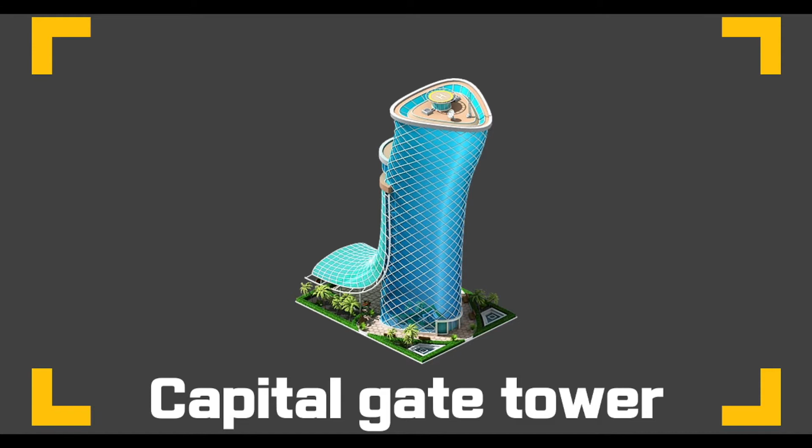It is the Capital Gate Tower. It has its name listed in the Guinness World Records for being the farthest leaning man-made building on this planet, having a leaning angle of 18 degrees. As you can see, this Capital Gate Tower, which is inclined to one side and twists as it goes up, has an appearance slightly off the original skyscraper.

Then how and why did this uniquely shaped tower get constructed? And why was it specifically built in Abu Dhabi? To understand the reason, we need to first know about the historical background of Abu Dhabi and its culture of the Sultan. UAE, which has the 6th largest oil reserves in the world, consists of 7 independent city-states. In these 7 states, the larger the area, the more oil was reserved, which meant strong economic power. Among these, Abu Dhabi was the largest of the states, so also the richest.

However, Dubai, which was 1/15 of the area of Abu Dhabi, was known to be more technologically advanced than Abu Dhabi, which made Abu Dhabi feel a strong sense of rivalry, and there was natural tension between the two. Starting from the early 2000s, Dubai began to construct high and massive architectures like Burj Khalifa and Burj Al Arab. Sheikh Sultan from Abu Dhabi, who was very rich, had studied architecture in his old days and naturally had interest in the architecture industry.

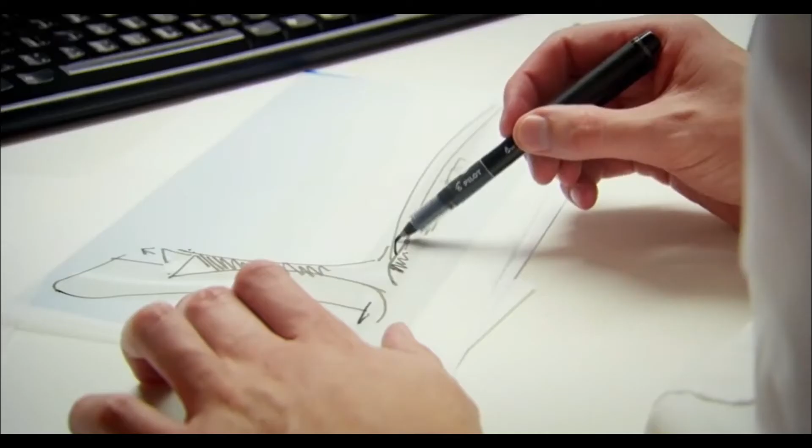Watching the high landmarks of Dubai getting constructed, he had a desire to construct such a landmark in Abu Dhabi too. Having a strong sense of rivalry, he wanted more than just a high and massive building. He wanted something that could be called architecturally impossible. Receiving this request, it was now the designer's job to come up with an extraordinary design that would satisfy the Sultan. The surrounding scenery helped them with their job.

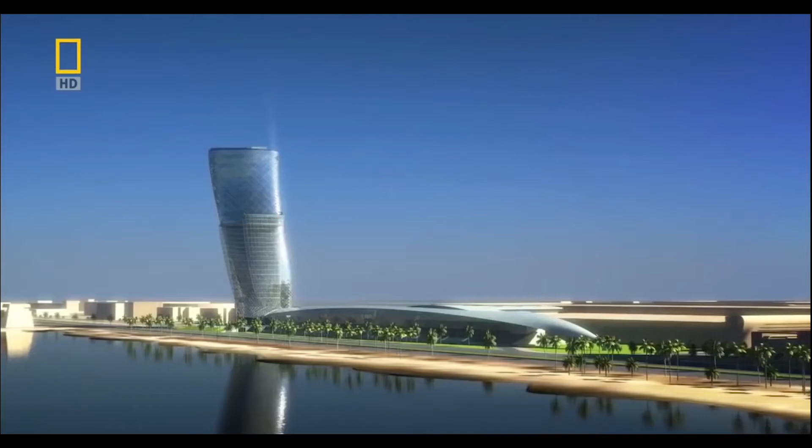The designers got inspired by the beautiful seaside and dunes of Abu Dhabi. Getting ideas from the two elements, the rolling waves and the sand's spiraled shape, they wanted to design a building with a tilted and twisted shape that would go well with the beautiful scenery of Abu Dhabi. Also, the curved canopy, known as the splash, creates a wave-like effect given the building is close to the water, with Abu Dhabi's heritage being near the sea.

With the lean, twist, and the splash, the designers had designed this curvaceous shape of the Capital Gate Tower, and this would be able to be perfectly connected physically and visually with its site. However, this complicated piece of design needed many special measures taken to sustain itself. The structural engineers had to think of a way to prevent the leaning building from toppling over. They came up with 2 important installations.

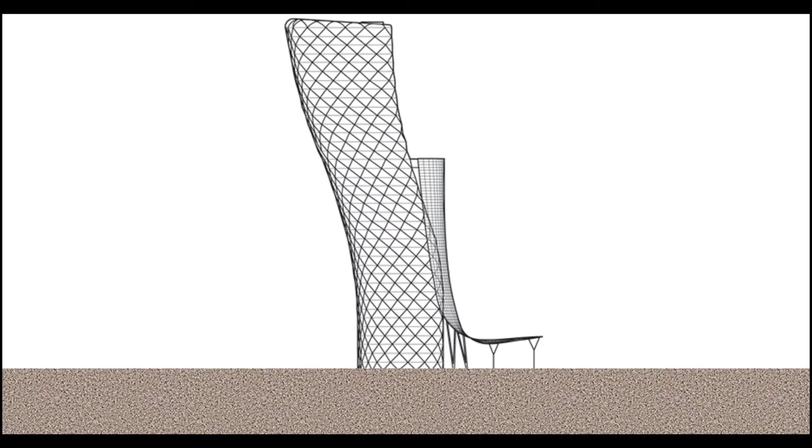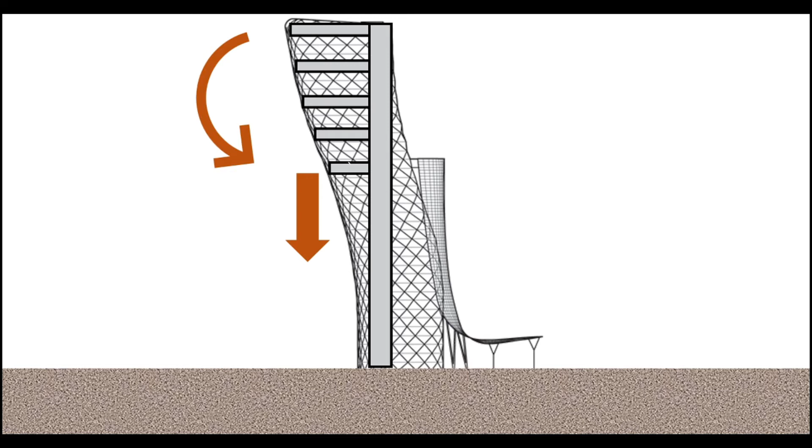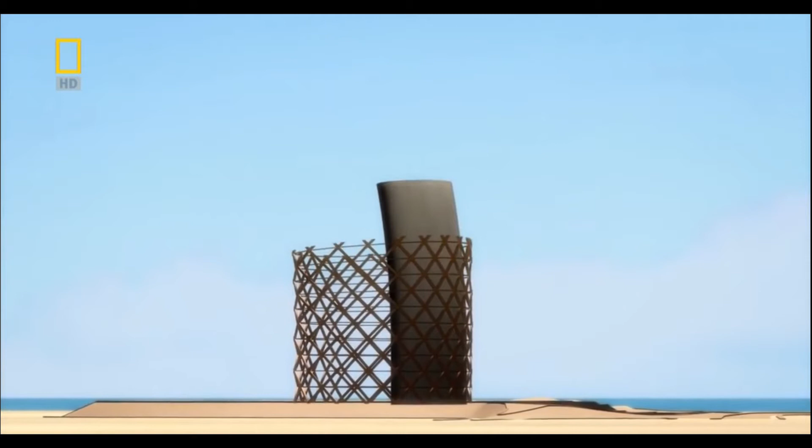First, to realize the leaning shape, the designers devised a method to install biased slabs, making longer spans while going up. But engineers knew if they installed the slabs like that, a vertical core would not be able to sustain the overhang and moment, as well as its vertical loads. So, the engineers decided to make a new core named pre-cambered core, which was bent to the opposite direction of the leaning part. As constructors added the slabs to the upper levels, the weight of the leaning parts would pull the core back into a vertically straight state. The whole core would be in tension, and that would give it immense strength.

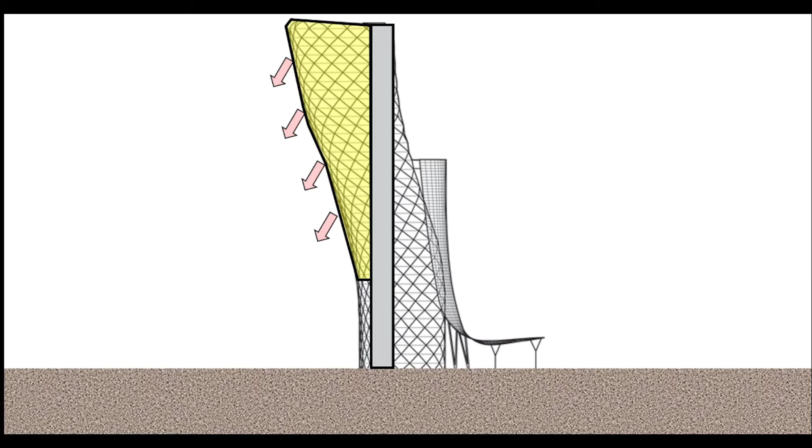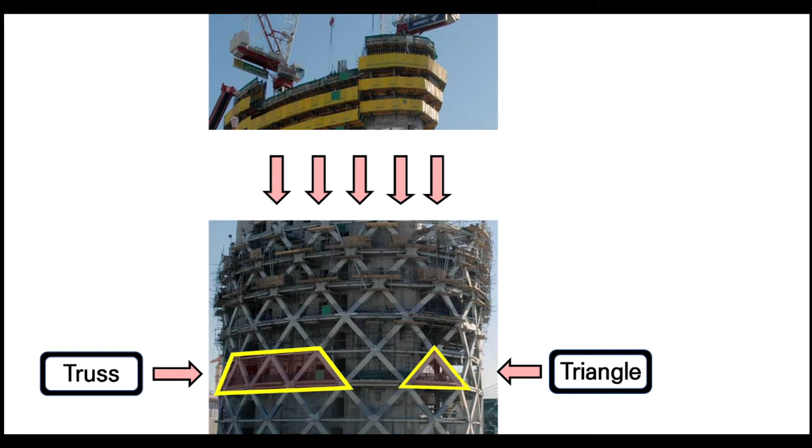Secondly, they wanted some other method to resist the lean's load without spoiling the beauty of the tower. Inspired by the thin layers of eggshells, the structural engineers decided to use a diagrid acting as a uniform net so that forces were evenly distributed. Based on the truss structure, the triangular unit can not only resist vertical loads like the core, but also transfers the subjected lateral load to the member below.

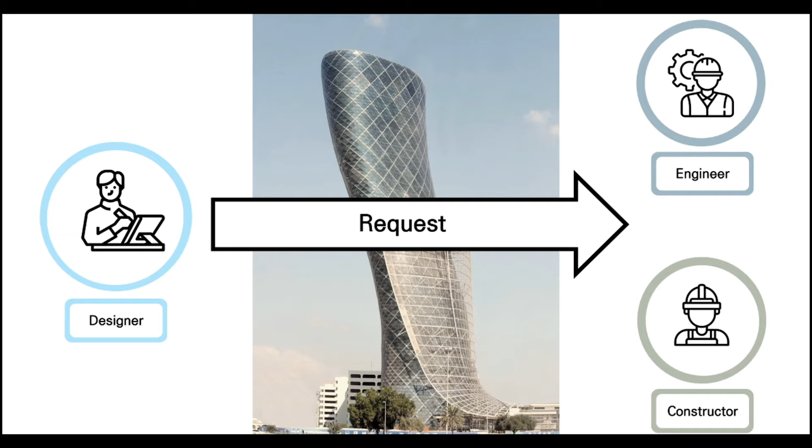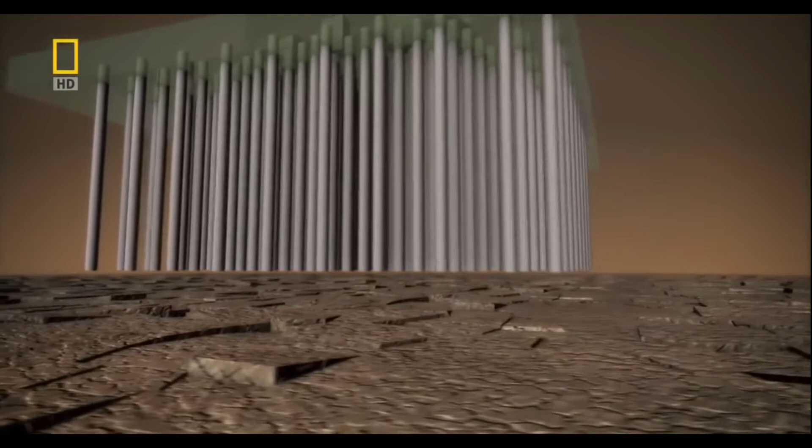Now, it was the constructor's job to realize the designer's request and the structural engineer's theoretical solution and make this impossible building come true. In the realizing step, before constructing the pre-cambered core and diagrid, constructors had to make a unique foundation that could resist load, which was not evenly distributed on the ground, and the overhang caused by its leaning design. Also, Capital Gate Tower's site, which is close to the shore, had a weak foundation. So, it was necessary to use pile foundation.

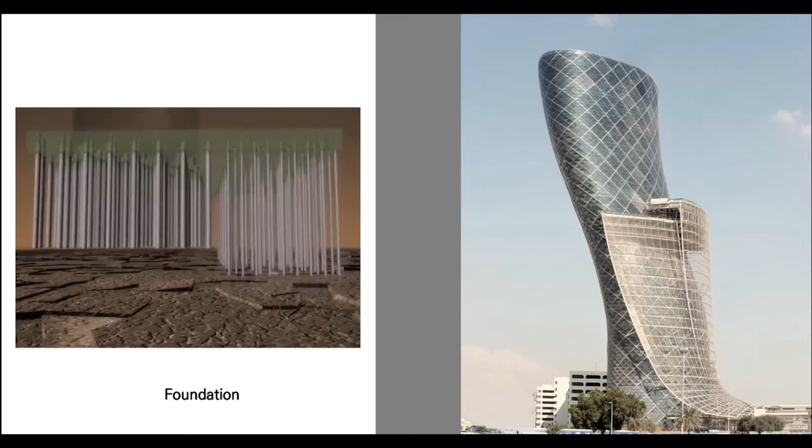They used 203 friction piles on the front side where the weight is going down into the ground due to the inclination, and 287 end-bearing piles run to a depth of 30 meters to the bedrock, anchored tightly to the soil. Thanks to this foundation process, Capital Gate Tower was one step closer to resisting the massive amount of overhang made by the leaning design. Now, the foundation is complete. To realize the lean and twisting form, other groundbreaking construction methods had to be used, which led to a harder process for constructors.

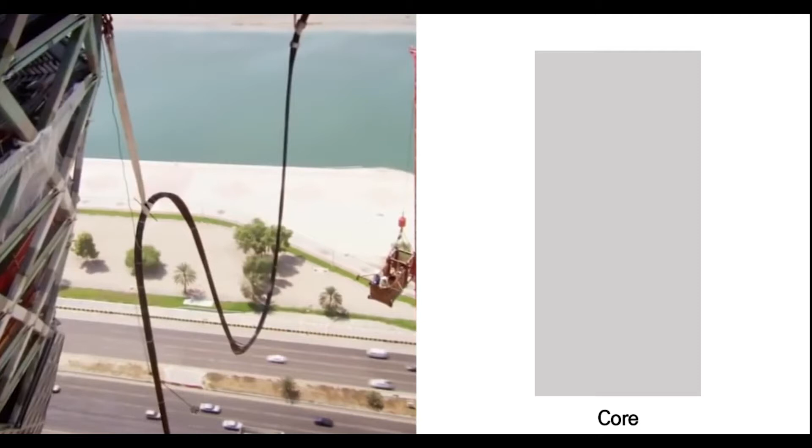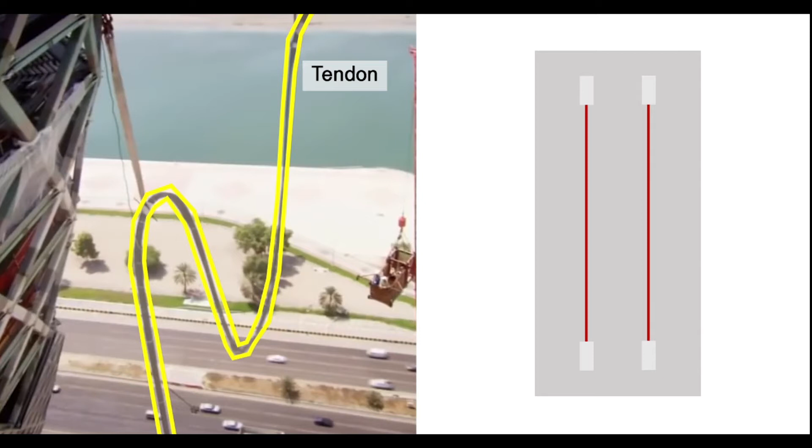On the construction site, to make the pre-cambered core, they had to prevent cracks generating due to the overhang. So, the constructors installed pre-stressed tendons to the core, which would counteract the pulling force created by the massive overhang, stopping the concrete from tearing apart.

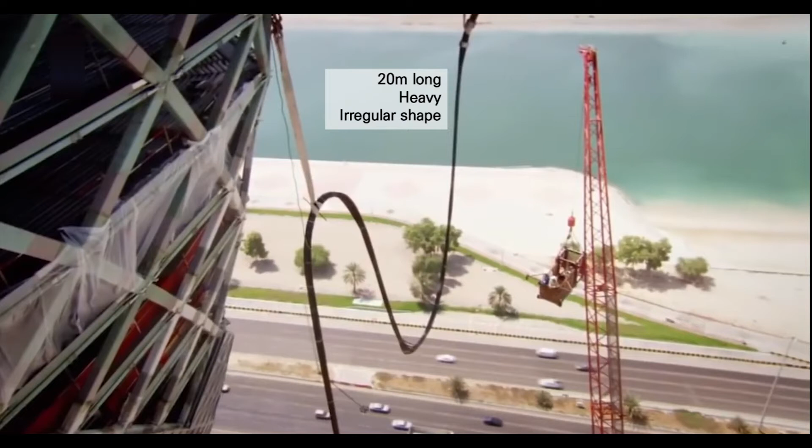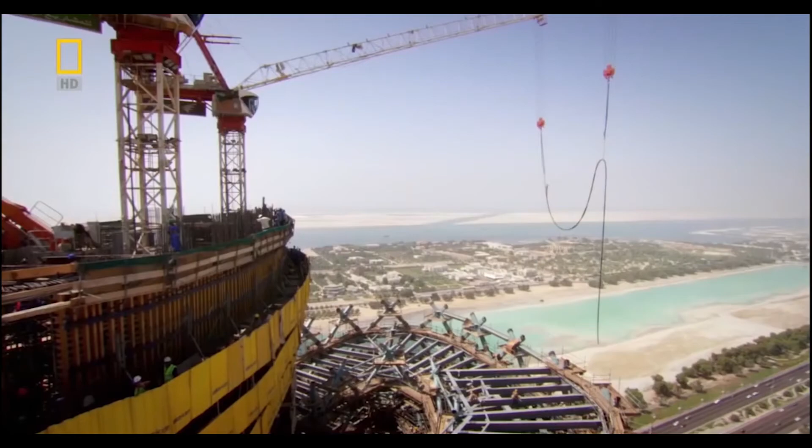As the tendons were 20 meters long, heavy, and bent irregularly, it was impossible to pick up the end point of the tendon and place the opposite point exactly into the duct by hand. That is why in this process, it was necessary to bring the crane to the construction site.

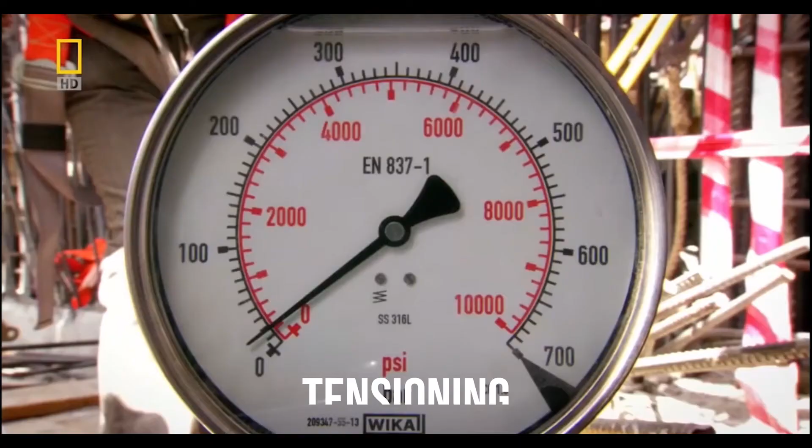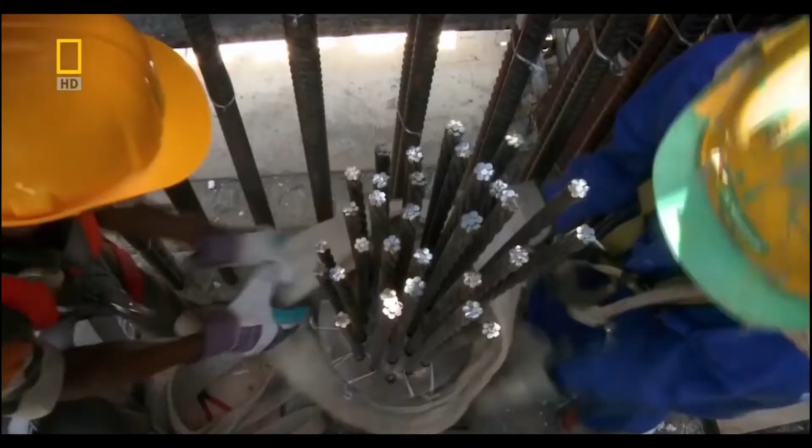The team used the steel tendon's weight to force it through a duct already cast through the core. Once the tendon got in position, the team would lock off both ends, ready to tension its individual strands once again. This method had not been used before, but it was very effective in increasing the strength of the core. They made 4 meters of core in a week and repeated the same work.

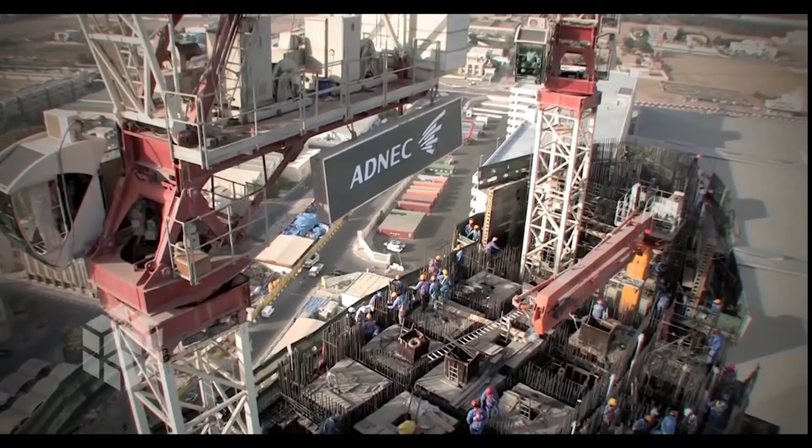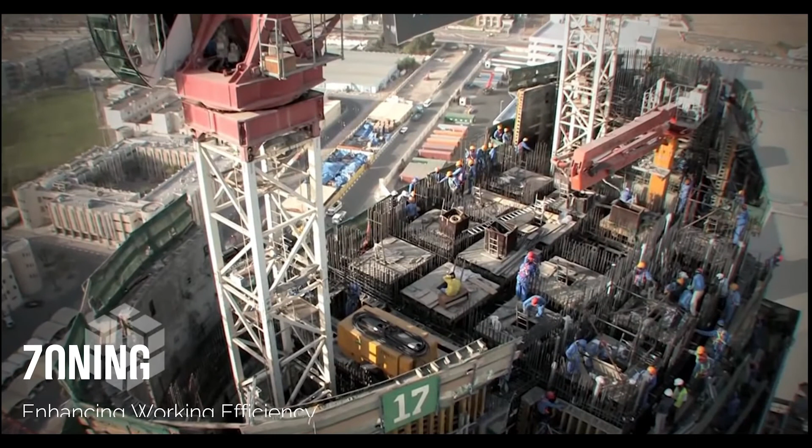But this repetitive method wasn't used for the whole units of the core at once. Among the ways to complete a fixed quantity in a timely manner, there may be a method of adding more manpower or extending the work time. But this wouldn't be the optimal solution. The engineers divided the core into 3 sections.

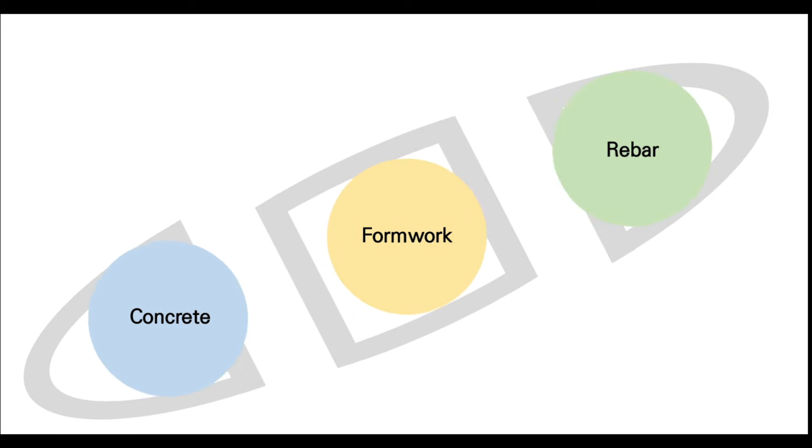The workers of formwork, rebar work, and concrete pouring work would not interfere with each other. As a result, the process is constantly circulating and can proceed at the same time. So even a small number of workers could perform fast construction.

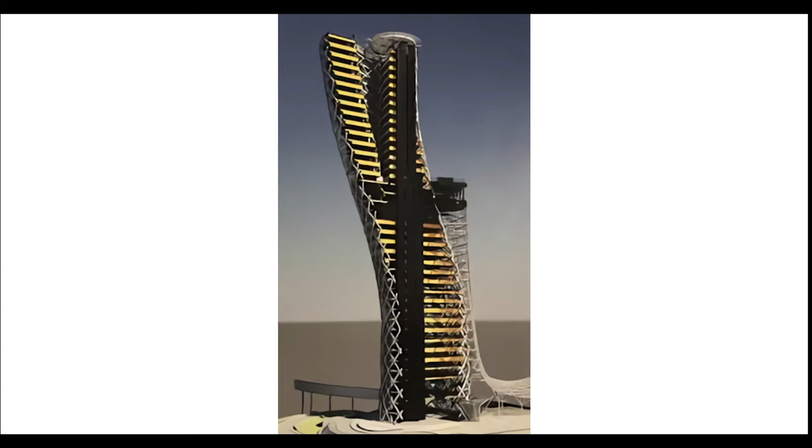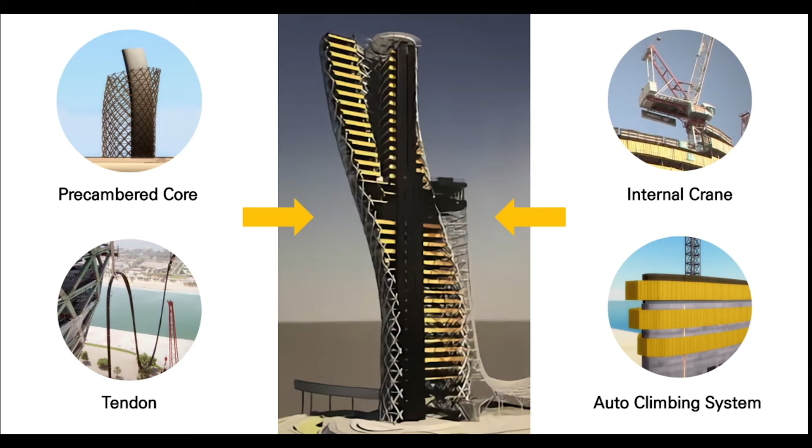Eventually, Capital Gate Tower's core could be realized with a new technology named pre-cambered core and tendons, along with appropriate usage of existing methods like the internal crane and auto climbing system.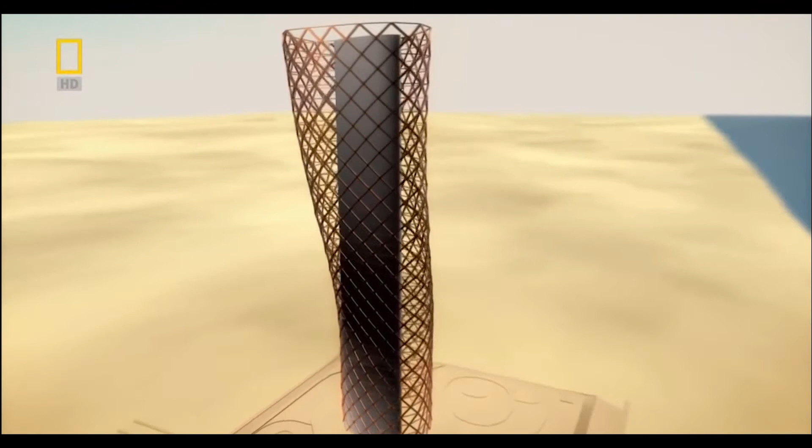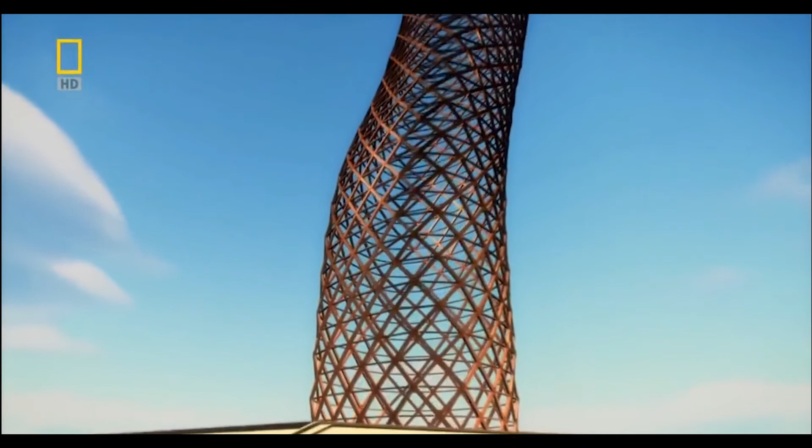Now, to realize the twist of Capital Gate Tower: unlike the normal uniform diagrid, it was indispensable to use all different diagrids with their unique geometric shapes. Besides, it would be extremely difficult to connect these unique shapes into one whole mesh. If the diagrid is not assembled with millimeter accuracy, the mesh will be unable to channel the loads, and the structure would become meaningless.

With BIM and a Tekla 3D model, they precisely predicted each unique cruciform's detailed length, curvature, and different form of nodes to connect them. With these, they were able to make 720 designed cruciforms, no two of which were the same.

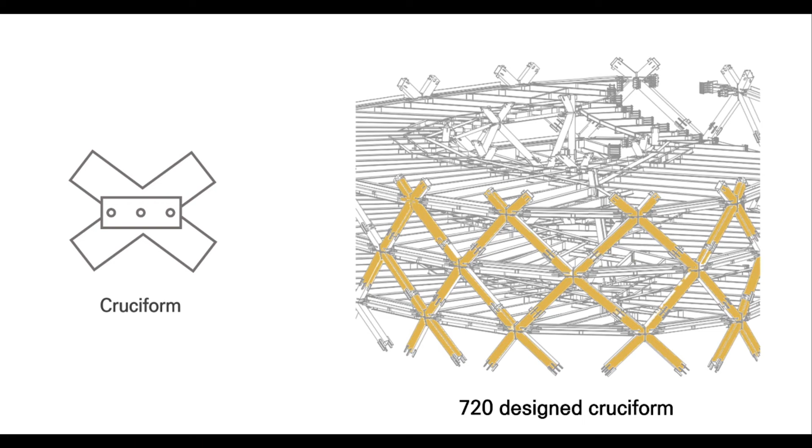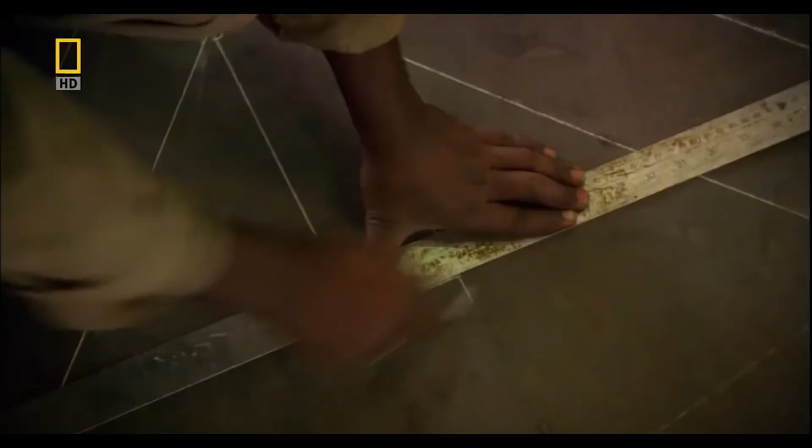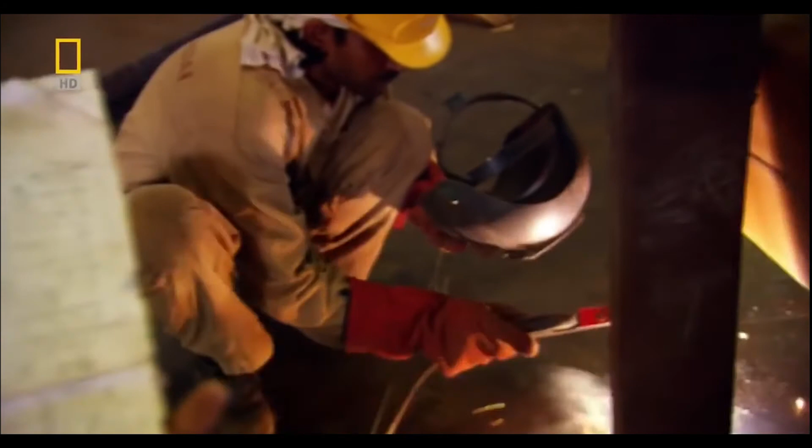The engineers used an old-school method, chalk, to mark and calculate exact angles. It might look unsophisticated that they drew plans on the ground with rulers and a protractor, but it was highly accurate, ensuring all the members. After that, they could cut and connect each member according to the chalk line drawn by the constructors at specific angles with high accuracy.

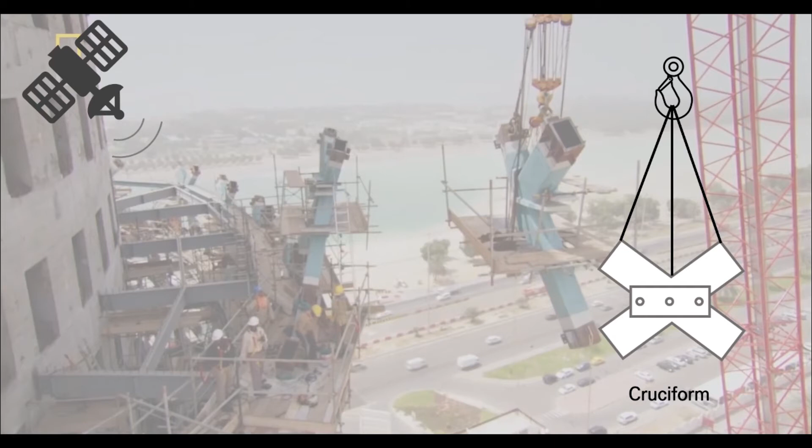What was left for them was to accurately assemble the unique forms to create a uniform net for the load. When they started to assemble those, a three-dimensional GPS system was used. The global 3D coordinates taken from the Tekla model were utilized for erecting the diagrid assemblies at their exact position.

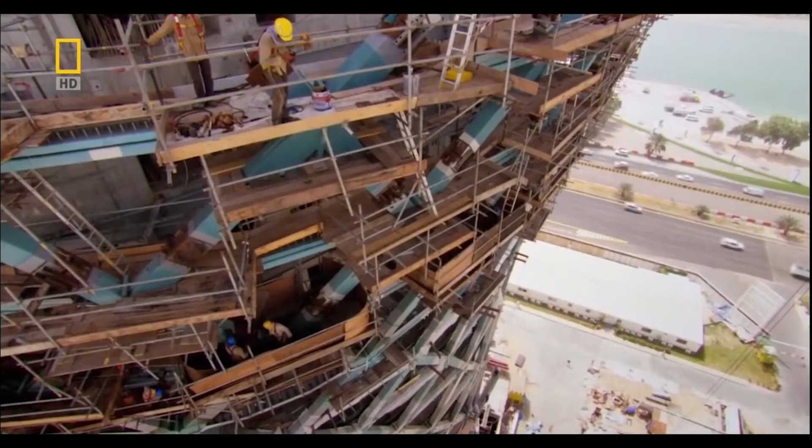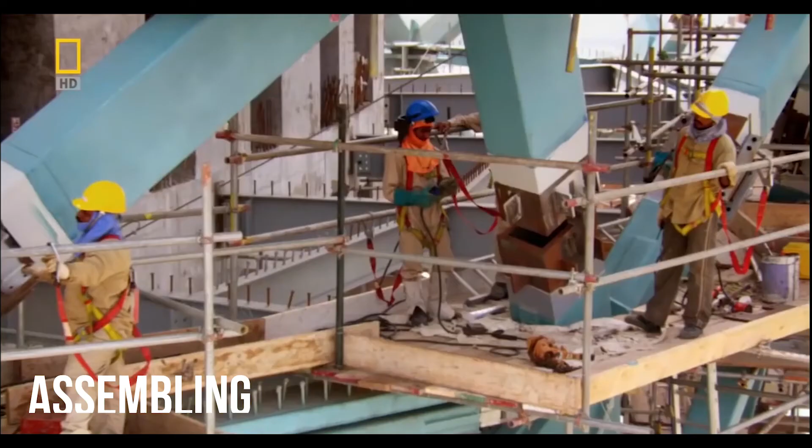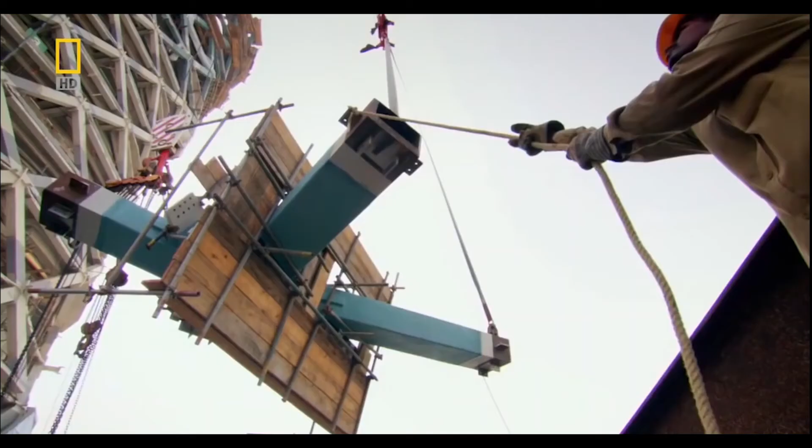When each cruciform was lifted to the precise position, a team of 240 steel fabricators matched the opposite side of the endpoint on hand, assembled the diagrid with nodes, and welded all three together. By this, the constructors could proceed with the task accurately. The diagrid was finished.

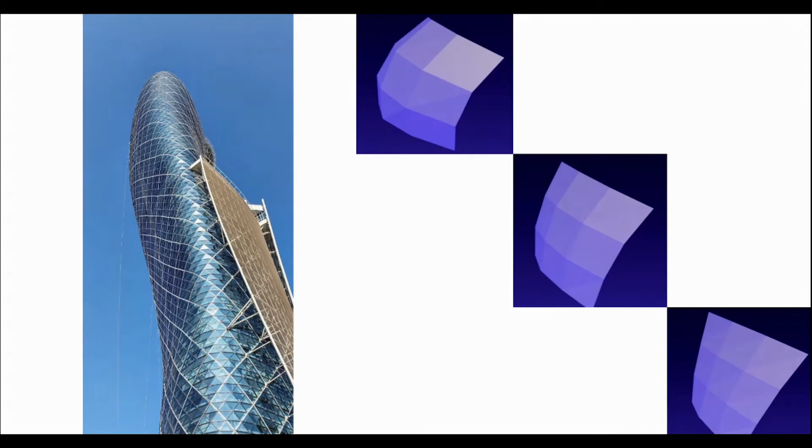What was left for them was to assemble them with glass claddings and finish the facade. To realize the twisted form, they had to attach all the different shaped diamond units. In the process, they needed millimeter accuracy, but there was a different problem from the diagrid.

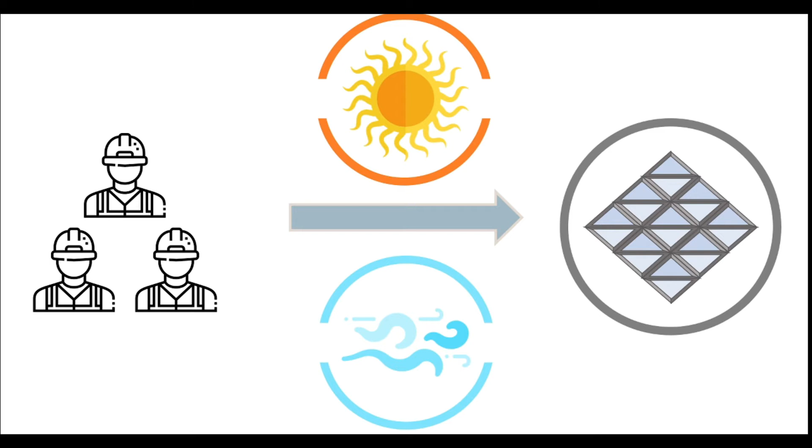We have mentioned before that the pre-cambered core straightens as it grows, so it means that the skyscraper will not stop moving until after completion. More than that, with the harsh climate conditions of Abu Dhabi, the facade had to accommodate the additional movement due to heat expansion and strong wind. Keeping these in consideration, the construction team had to find reasonable solutions to realize this complex facade with glass panels.

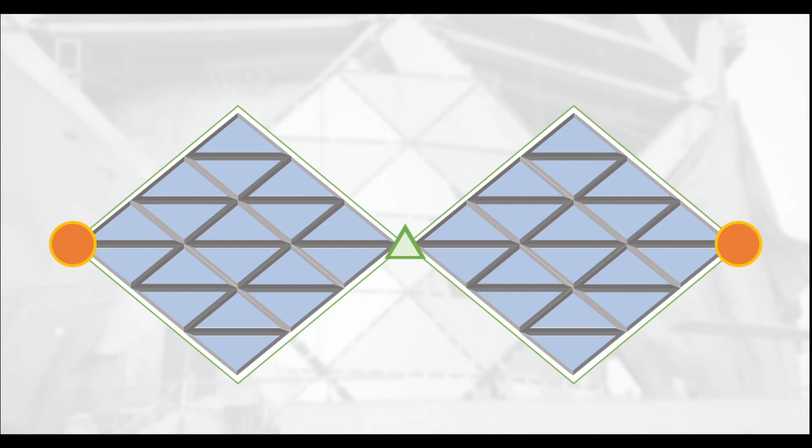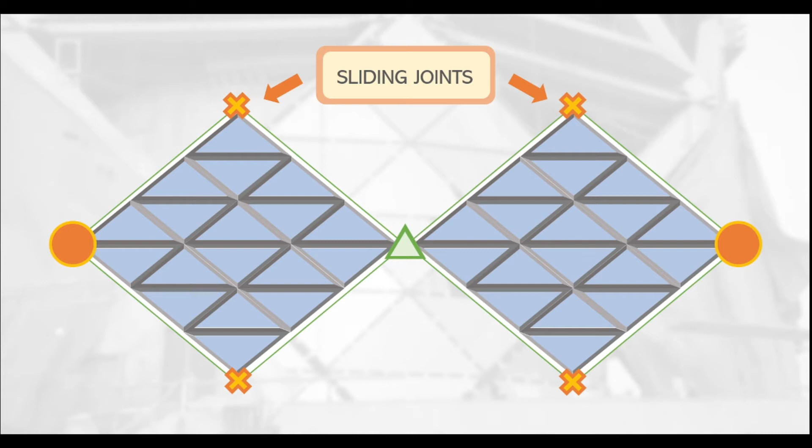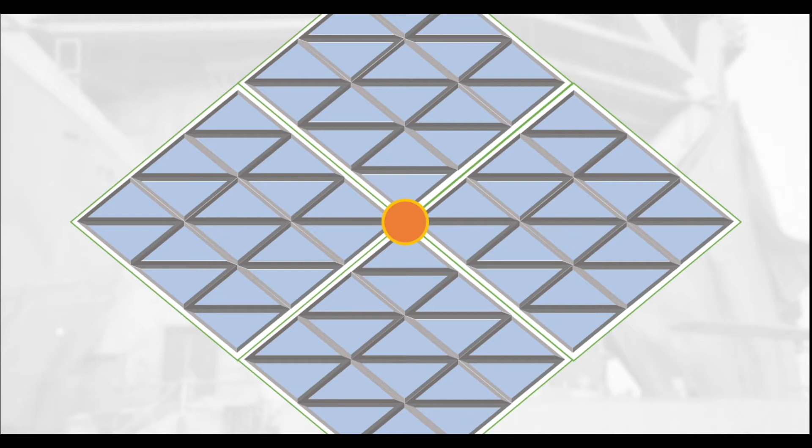At Capital Gate, each large panel was fixed in just 2 places at each side. A special sliding joint was developed to locate at the top and bottom of each panel, allowing room for additional vertical building movement. As the diamonds were stacked over one another, starting from the bottom, the remaining unfixed 2 points would be fixed by attaching the next diamond, and this process would repeat. This would give room for extra movement during the construction before all points would be totally fixed.

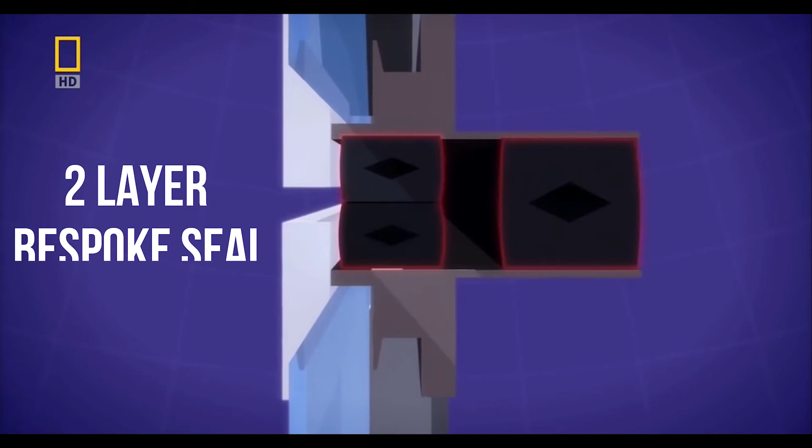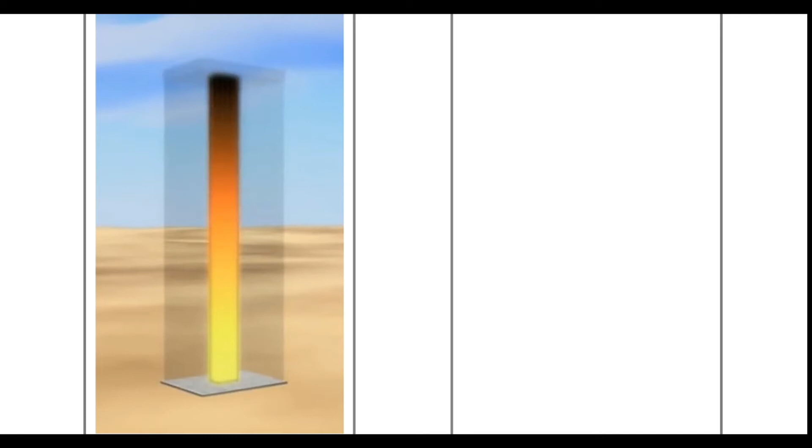They also used a special system in connecting the diamonds. Diamonds connect to each other with a 2-layer bespoke seal. The flexible spongy seal facilitates movement. With this, the pre-cambered core and diagrid were able to successfully realize the leaning, twisted form of Capital Gate Tower.

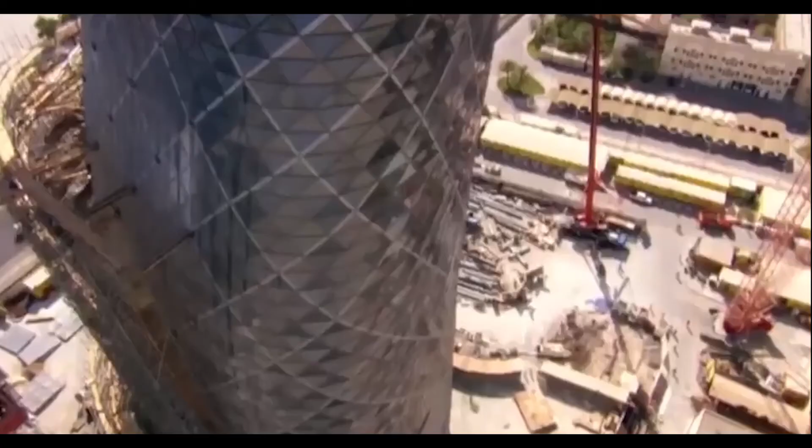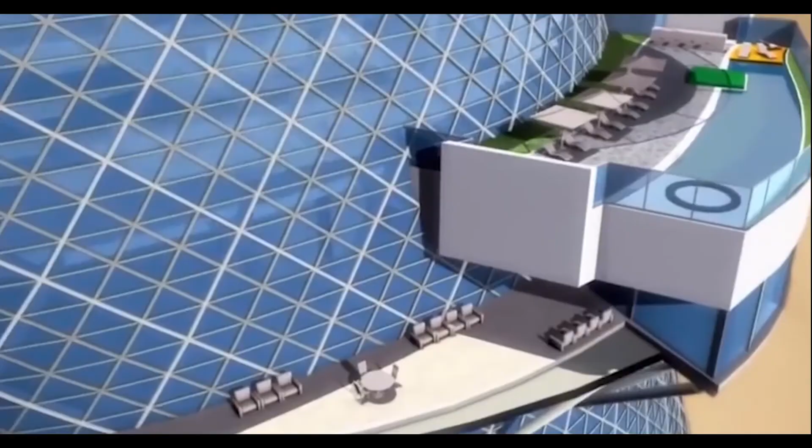Finally, they had realized the leaning appearance. But this was not enough to satisfy Sheikh Sultan's request to make Capital Gate Tower an iconic building. The designers came up with a new demand for additional structures, pushing the design to the extreme. They wanted to build an infinity pool and a restaurant hanging 100 meters above the ground, without any visible support.

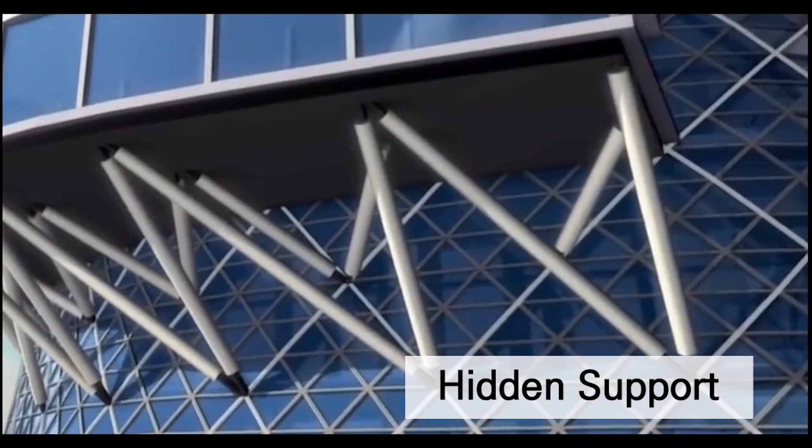To accomplish this, the structural engineers brought on hidden structures and the principle of the insects that can walk on water. However, it was still impossible to keep the additional structures to sustain this massive and heavy cantilever completely hidden. The designers came up with a great solution, and this is one of the most noticeable design features of Capital Gate Tower. It is the splash.

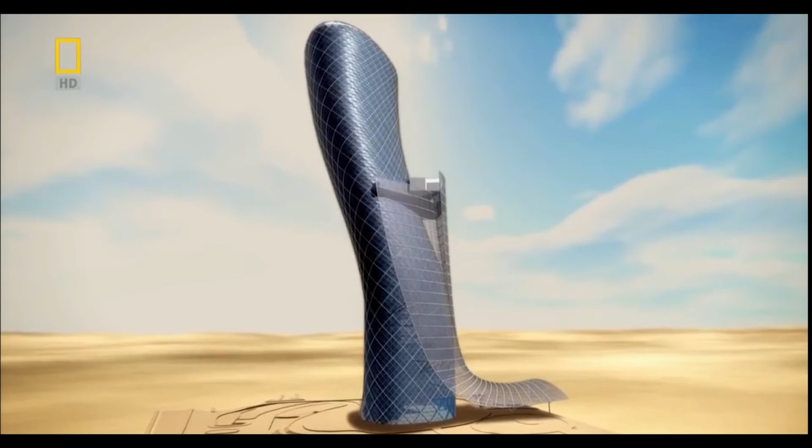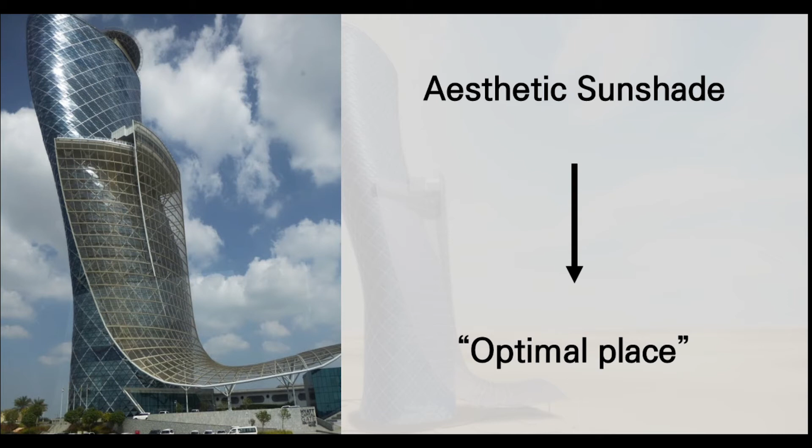It's a layer of woven metallic mesh stretched over a metal frame, stretching as an extension of the cantilever. This is not only an excellent design element, but it would shade the tower from the hot sun. However, installing this additional structure would give immense load to the already massive weight. It was necessary to put it at an optimal place.

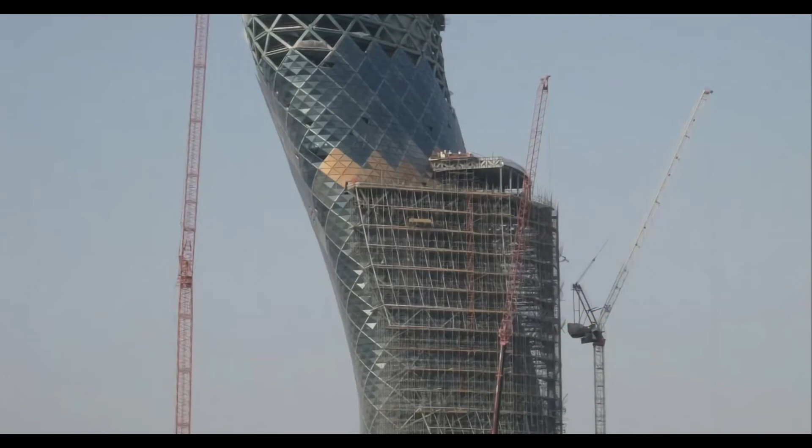When the engineers who managed the load of the building received the demand of cantilever, they had to suggest an idea to solve the already existing massive overhang and also stabilize the extra structure. The engineers suggested counteracting by installing cantilever on the opposite side of the lean to reduce the immense overhang. But even with the cantilever, it was not enough to reduce the overhang.

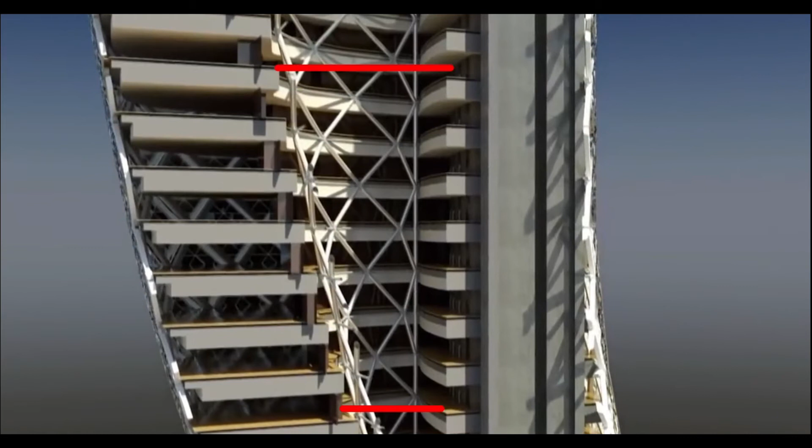In the upper part, they had to find a solution to sustain the building's increasing floor weight and overhang due to the lean. Engineers and designers consulted and decided to diet the leaning upper load that caused the overhang fundamentally. This was when the architects came up with a clever solution. It was bringing in an internal atrium inside the upper floors of the building. With the void getting larger as it goes up, it has the shape of a funnel. It helped the tower sustain the lean, preventing it from toppling over.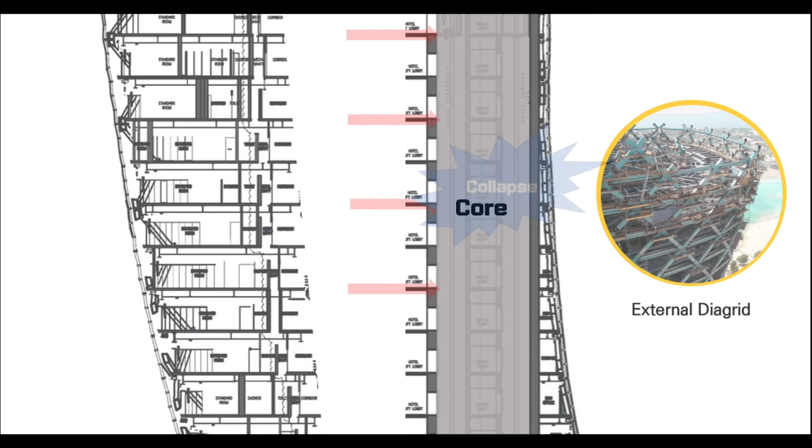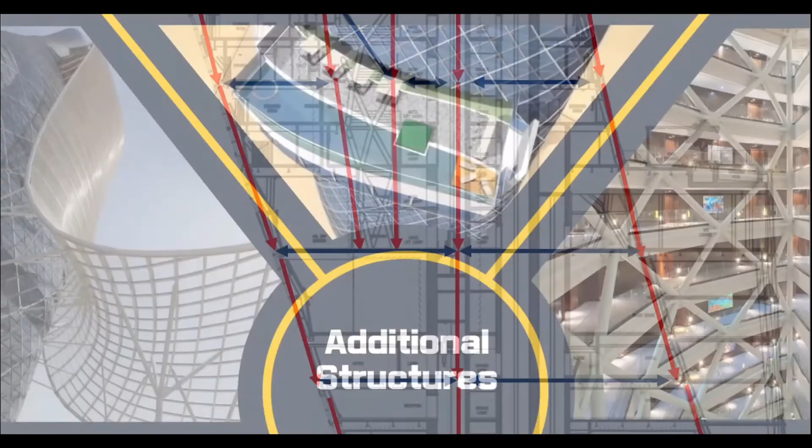However, with this empty space, the upper load of the building would become unpredictable, and putting too much pressure on the core, it might collapse. So, they mirrored the external diagrid to make an internal diagrid. With this, it could successfully gather the loads and disperse them back into the adjacent diagrid and to the whole part of the building, thereby reducing the burden. The additional structures, requested as a design factor for the iconic building at first, were actually structurally helpful and energy efficient. With these, they had almost finished constructing the iconic building.

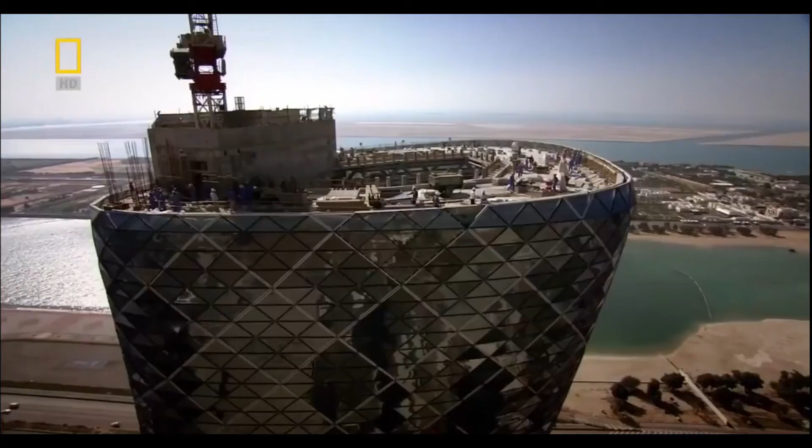With the efforts of engineers and constructors, the additional requests of the designers were almost finished. However, 6 months before completion, when everyone thought that the construction was almost done, Sheikh Sultan made an urgent request that a helipad be built on the roof of the building. When the contractors first heard about this, they thought it was just a joke. But when Sheikh Sultan called them directly, the contractors had to think about putting a helipad at the highest point in Abu Dhabi. This request seemed easy at first, but it posed a serious problem.

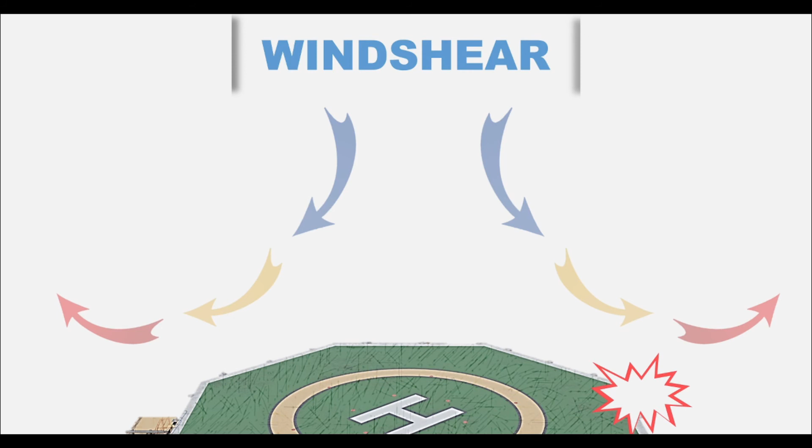That was wind shear tipping the whole helicopter on its side. Wind shear refers to a phenomenon that occurs in the process of filling air in an empty space due to a difference in wind speed. The rapid change of wind speed by wind shear often affects the blades of helicopters about to land and causes accidents. So, they had to predict and prepare for wind shear that could occur on the roof in a short time. The best way in this situation was to make a model and put it in a wind tunnel.

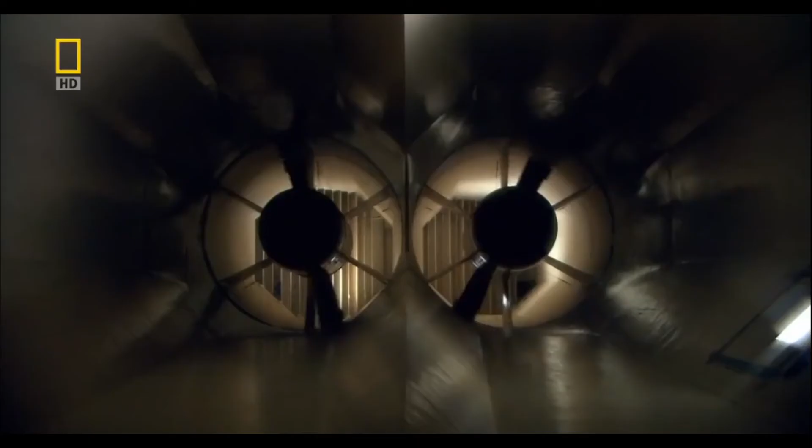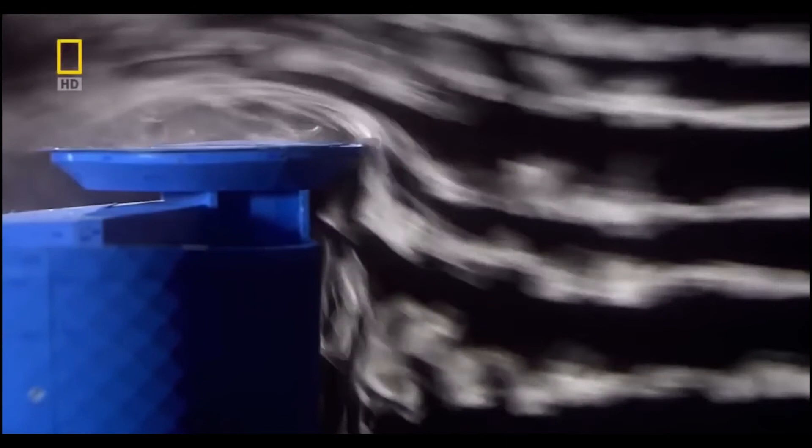A scaled-down Capital Gate has entered a high-tech wind tunnel in London. In this experiment, the contractors get the most undesirable result. It happened that the wind shear situation was worse than expected. Wind shear created an air curtain flow over the top of the building. Spiraling turbulent flow separating the surface was created. This was not the only problem the wind tunnel test showed. The winds affecting the helipad created large suction force. This force tried to blow the helipad off the roof of the building.

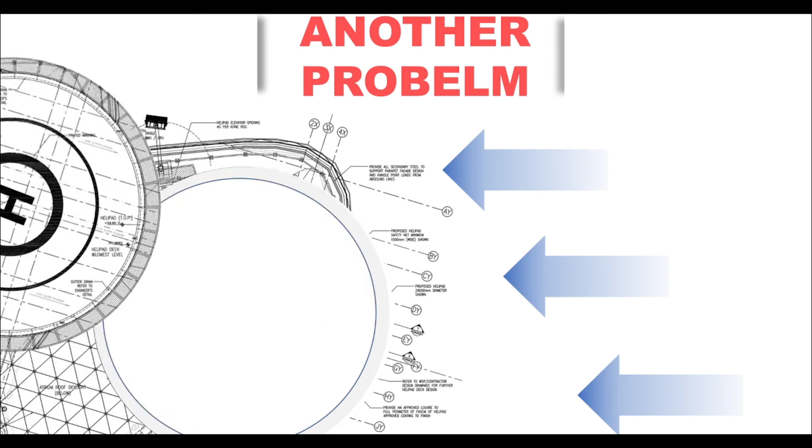In order to make this helipad safe, the builders decided to lower the position of the helipad 2 meters, because the tip of Capital Gate Tower's top leaning side could protect the helipad and the helicopter's course from strong shear wind. Lowering the helipad was not an optimal design. However, after wind tunnel tests were conducted, they could find out that they had successfully reduced the wind shear threat.

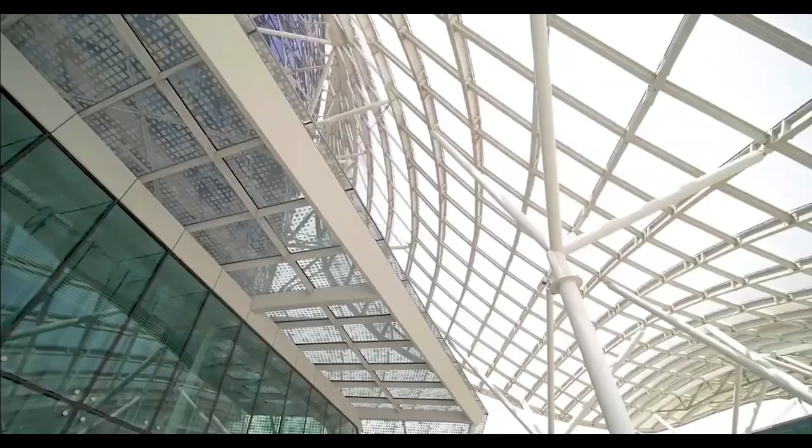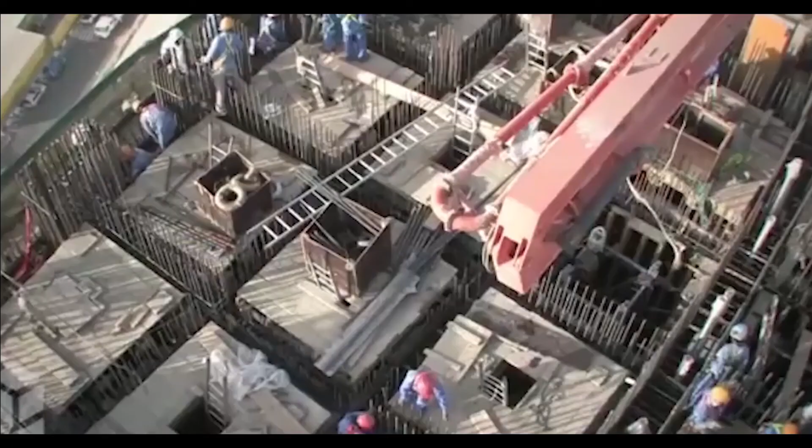This seemingly impossible building that the Sultan wanted was realized with lots of people's efforts. The designer's endless pursuit for the gorgeous building, engineers' massive sense of responsibility for safety, and the constructor's willpower of never giving up realizing it. Without these three parts in harmony altogether, the drawing's result would not have been able to come to life before our eyes.

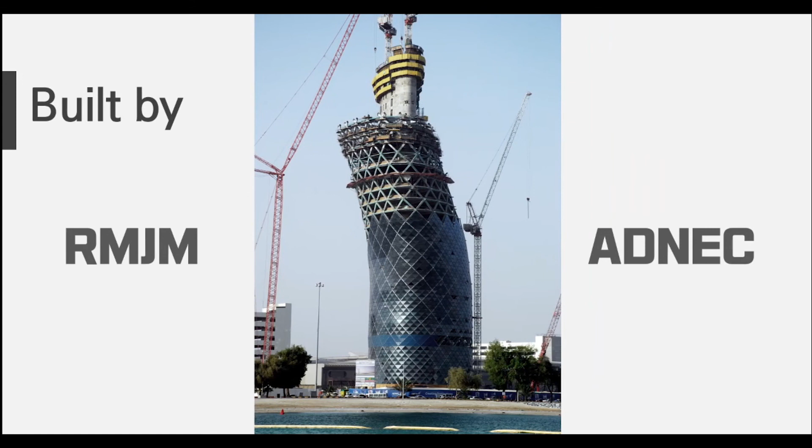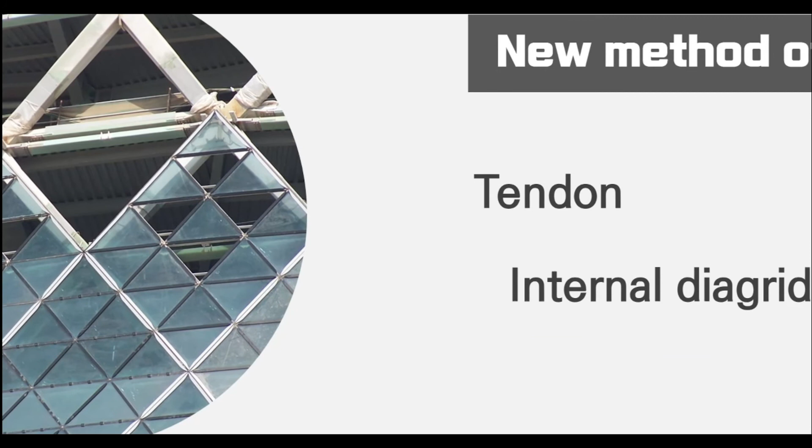Studying this building, we were able to learn the overall construction methods and principles that were difficult even for experienced experts. In the start of this construction engineering class, our first impression of the Capital Gate Tower was that its appearance was simply beautiful. But after 12 weeks of studying, we were able to trace the efforts of constructors and their engineering methods and studies that were reflected in the building. And this was a very educational opportunity for us.